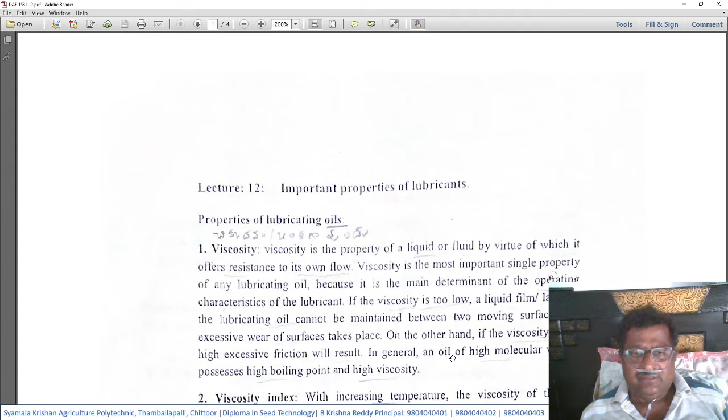Number 1, viscosity. Viscosity is the property of a liquid or a fluid by virtue of which it offers resistance to its own flow. Viscosity is the most important single property of any lubricant oil because it is the main determinant of the operating characteristic of the lubricant, since the entire lubrication process is based on the viscosity of that substance. So this is the most important property of a lubricant.

If the viscosity is too low, a liquid film or a layer of the lubricant oil cannot be maintained between the two moving surfaces, so excessive wear of surface takes place. If the viscosity is very low, it means the lubricant material is thin, so maintaining it between the two moving surfaces is very difficult.

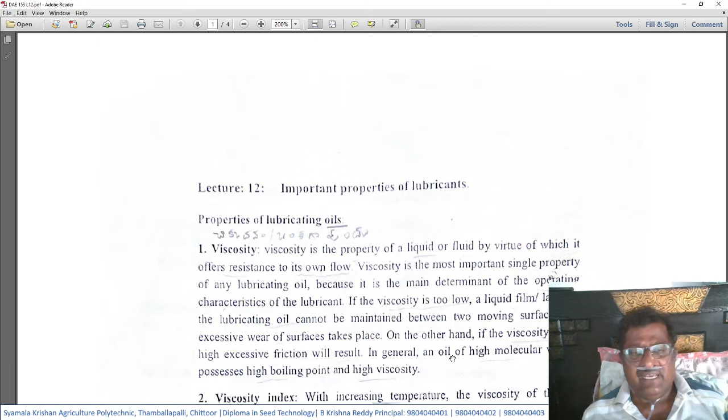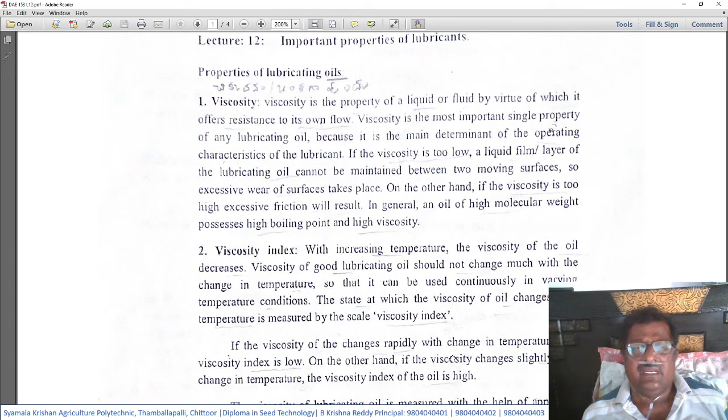In general, an oil of high molecular weight possesses high boiling point and high viscosity. In general, how we come to know that a particular lubricant oil is more viscous or not is by knowing its molecular weight. If the molecular weight of a particular lubricant is high, it indicates that the boiling point is also high, and at the same time the viscosity of that substance will be high.

Number 2 property, viscosity index. With increase in temperature, the viscosity of the oil decreases. It is a natural phenomenon. Whenever a lubricant is heated to higher temperatures, the viscosity will decrease and it starts flowing freely. Viscosity of a good lubricant oil should not change much with the change of temperature, so that it can be used continuously in varying temperature conditions.

The best lubricant should possess the viscosity index in such a way that with changes in temperature, it should not change its properties too drastically. Definitely when the temperature increases, the properties of the lubricant substance will vary, but it should be minimum, so that the properties of the lubricant will be there to serve as a lubricant.

The rate at which the viscosity of the oil changes with temperature is measured by a scale called viscosity index. That is, it is the temperature at which the viscosity of the oil changes that is known as the viscosity index. If the viscosity changes rapidly with change in temperature, then the viscosity index is low. On the other hand, if the viscosity changes slightly with change in temperature, then the viscosity index of the oil is high.

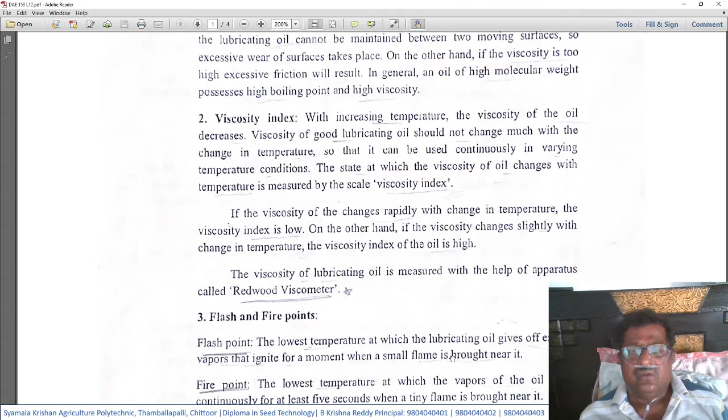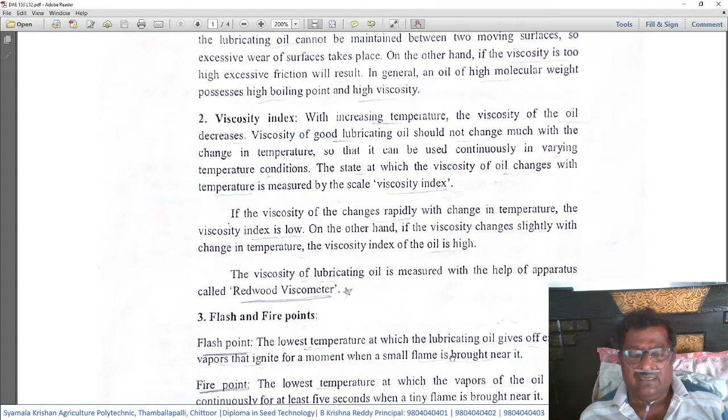To be a good lubricant, it should possess the viscosity index on a higher level. The viscosity of the lubricating oil is measured with the help of an apparatus called the Redwood viscometer. Students should remember the name of this apparatus, as there is a very good possibility that this question can be asked: what is the name of the apparatus used for measuring the viscosity of a lubricating oil? The answer is Redwood viscometer.

Then the third property, flash and fire point. Flash point is the lowest temperature at which the lubricating oil gives off enough vapor that ignites for a moment when a small flame is brought nearer to it. So at this temperature, the lubricating substance will give off small quantities of vapor, and when a flame is brought nearer to that vapor, it will get ignited for a short moment. This particular temperature is known as the flash point temperature.

Then fire point, the lowest temperature at which the vapor of the oil burns continuously for at least 5 seconds when a tiny flame is brought nearer to it. This fire point is beyond the flash point, and it is the temperature level at which the lubricant substance will get vaporized and produce sufficient vapors to catch fire and continuously burn for at least 5 seconds when a flame is brought nearer to it.

First, any lubricant material will come to flash point. Then after further heating, it comes to the point of fire point. These are the temperature levels. In most cases, the fire point is 5 to 40 degrees higher than the flash point, since the fire point is subsequent to the flash point.

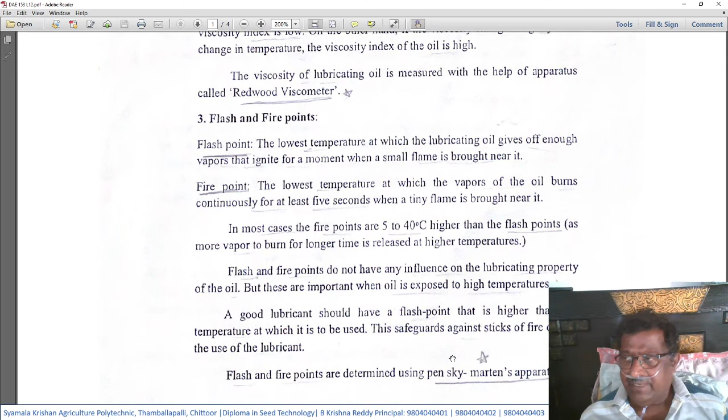A good lubricant should have a flash point that is higher than the temperature at which it is to be used. The conditions under which the lubricant is used should have a flash point or fire point much higher than the operating temperatures of the machinery. This safeguards against firing during the usage of the lubricant.

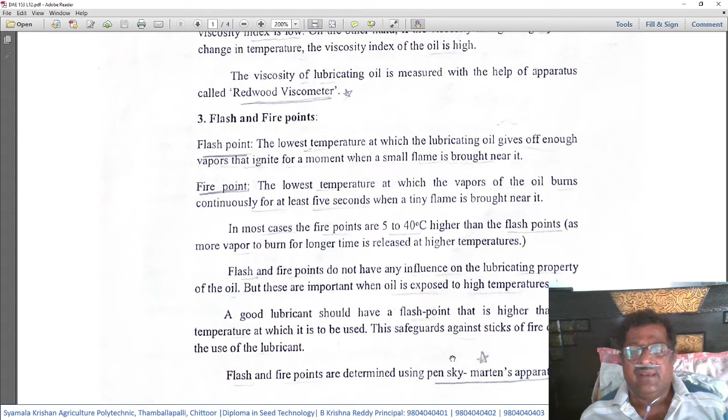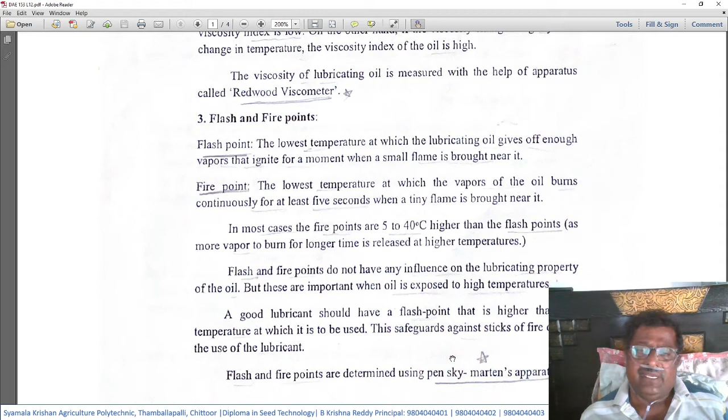Flash and fire points are determined using the Pensky-Martens apparatus. Students are expected to remember this name also. This fire point or flash point is determined by using an instrument known as Pensky-Martens apparatus.

The fourth property is cloud point and pour point. When the lubricating oil is cooled slowly, the temperature at which it becomes cloudy or hazy in appearance is called the cloud point, while the temperature at which the oil ceases to flow or pour is called the pour point. Cloud and pour point indicate the suitability of a lubricant in cold conditions.

When the lubricant is subjected to decreasing temperatures, as we decrease the temperature, when the lubricant oil becomes cloudy or hazy in appearance, that particular temperature is noted as the cloud point. When we further reduce the temperature to a certain level, the lubricating oil stops flowing, that is, it freezes. That point is known as the pour point. So cloud and pour points indicate the suitability of a lubricating substance in cold conditions.

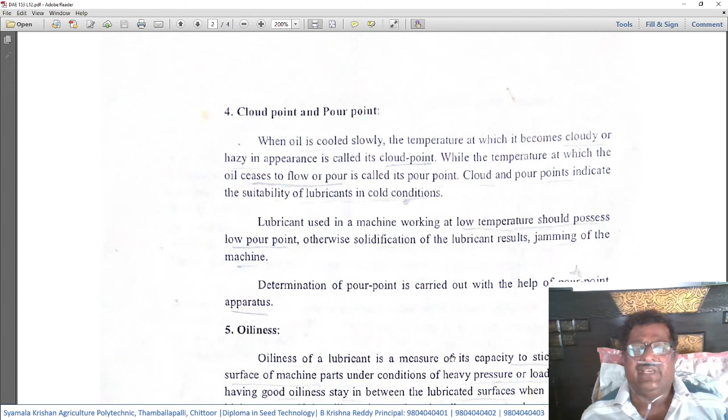Under cold conditions, the lubricant should not become cloudy or freeze; it should easily flow while maintaining its transparency. Lubricant used in machines working at low temperature should possess a low pour point, otherwise solidification of the lubricant results in jamming of the machine. If it has a high pour point, it will become solid immediately at low temperatures, and this creates jamming of the machinery, with machine parts getting jammed.

Determination of pour point is carried out with the help of a pour point apparatus, which is the machinery used to measure the pour point.

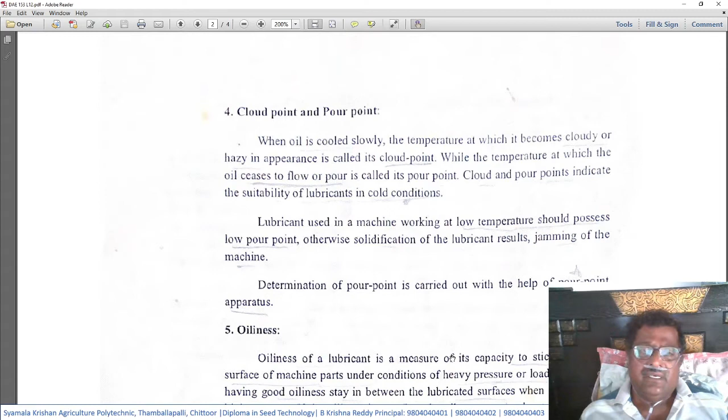The fifth property is oiliness. Oiliness of a lubricant is a measure of its capacity to stick onto the surface of machine parts under conditions of heavy pressure and load. This makes it stick strongly to the surface under high pressure conditions. Lubricants having good oiliness stay in between the lubricated surfaces when subjected to high pressure, even at very high load. If the oiliness is poor or low, the oil gets squeezed out of the place, thereby its lubrication action stops.

Suppose this oiliness is less, what happens? When it is applied between the two rubbing surfaces of a machine, it will easily get squeezed out of the place and it will be lost and no lubricating action will be there, and therefore the machine parts will get rubbed against each other and they will get damaged. So it is a very important property of a lubricant, especially for extreme pressure lubrication.

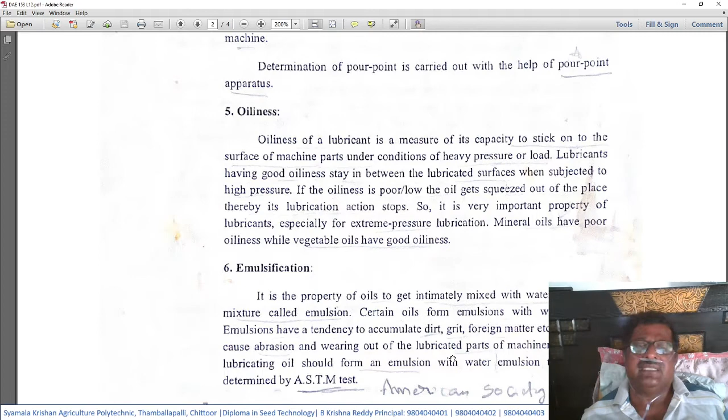Then the sixth property, that is emulsification. It is a property of oils to get intimately mixed with water, forming a mixture called emulsion. So emulsification is a property of a substance when it is mixed with water, then it should form a uniform mixture called an emulsion. Certain oils form emulsions with water easily. Some lubricant oils will have a property of mixing with water readily and forming a uniform solution known as emulsion.

Emulsions have a tendency to accumulate dirt, grit and foreign matter. So these emulsions will have a property to attract dirt and foreign materials, which can cause abrasion and wearing out of the lubricated parts of the machinery. When emulsified lubricants attract dirt and other foreign materials, the presence of such materials will create abrasion and cause wearing of the machined parts.

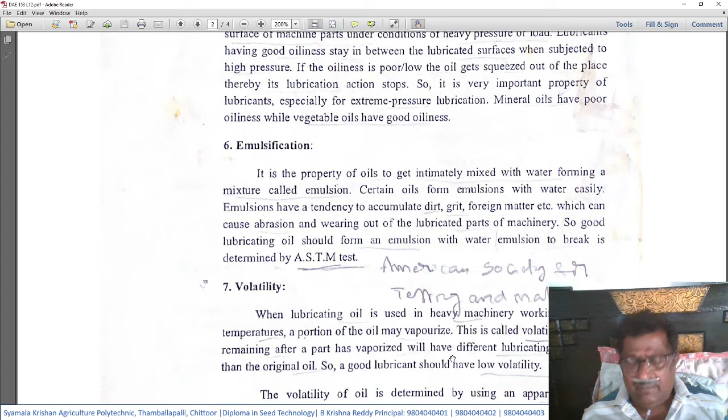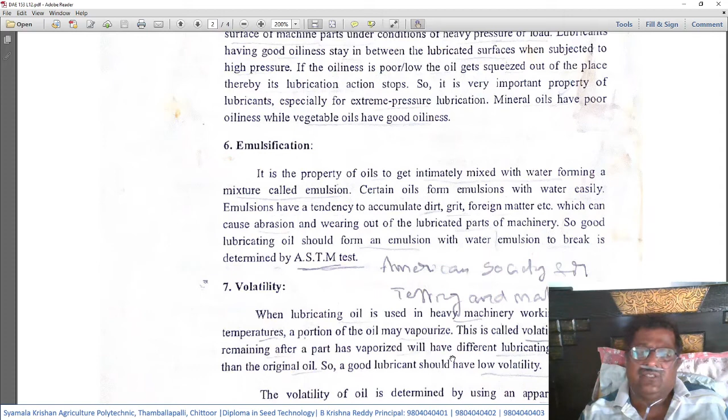So a good lubricant oil should form an emulsion with water that breaks readily. The emulsion that is formed should be very clear and it should not have dirt and other materials to be a good lubricant. This is measured, that is, emulsification of a particular lubricant can be measured by using a test called American Society for Testing and Materials, that is ASTM test. All students are supposed to remember the ASTM test, that is American Society for Testing and Materials.

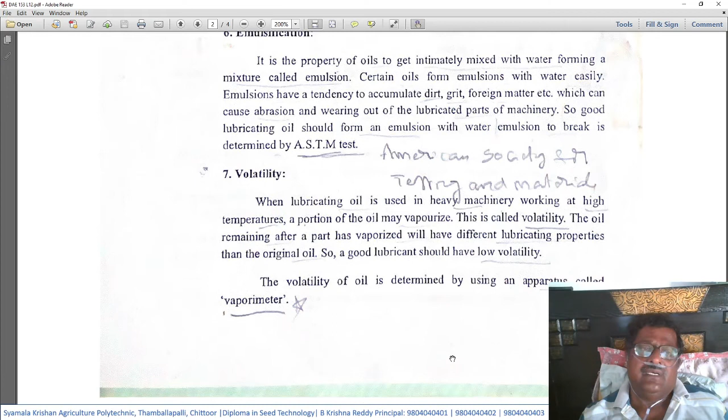Then the seventh property, volatility. When a lubricating oil is used in heavy machinery working at high temperatures, a portion of the oil may get vaporized. That means when lubricating material is kept between two moving surfaces of heavy machinery under heavy load, and when it starts working at high temperatures, a small portion of the lubricating substance will get vaporized to some extent. This is called volatility.

The oil remaining after a part of it has vaporized will have a different lubricating property. What happens when a part of the lubricating material gets vaporized? The remaining lubricating material will definitely lose its originality and thereby its lubricating properties are also lost. So a good lubricant should have a low volatility, meaning even at high temperatures and pressures, only a very minimum amount of lubricating oil should get vaporized and most of it should remain intact. Then only it is known as a good quality lubricant.

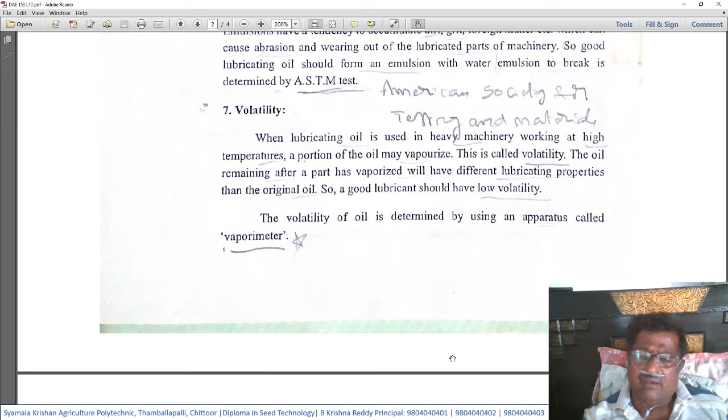So the volatility of an oil is determined by using an apparatus called a vaporimeter. This also students are expected to remember, that is the apparatus name, vaporimeter.

Then the last, eighth property, is carbon residue. Lubricating oils have a high percentage of carbon in combined form. That is, most of the lubricants will have carbon as a constituent. On heating, when this lubricating substance is subjected to heating, the oil decomposes and carbon is released, which will get deposited on the surface of the moving parts of a machine.

This deposition of carbon in machines is intolerable, especially in internal combustion engines and in air compressors, where it is not at all tolerable. Therefore, a good lubricant must have less carbon residue. So to say that a particular lubricant is best, it should have a minimum carbon residue in it after combustion or after usage.

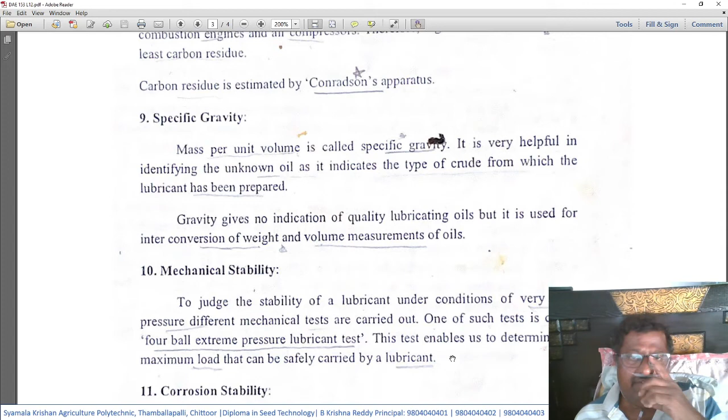Then the ninth property of lubricants, specific gravity. Specific gravity is nothing but the mass of a substance per unit volume. It is very helpful in identifying an unknown oil as it indicates the type of crude from which the lubricant has been prepared. So by knowing the specific gravity, we can know from what type of oil a given lubricant has been manufactured or prepared.

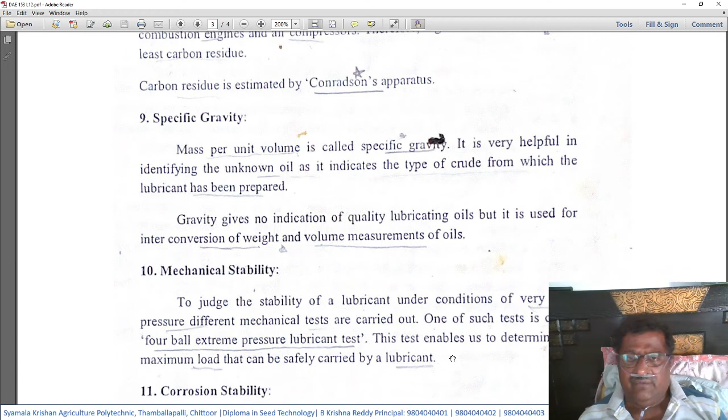Gravity gives no indication of the quality of the lubricating oil, but it is used for inter conversion of weight and volume measurements of an oil. While making lubricants, different quantities of different materials need to be used, and they can be measured either on a weight basis or a volume basis.

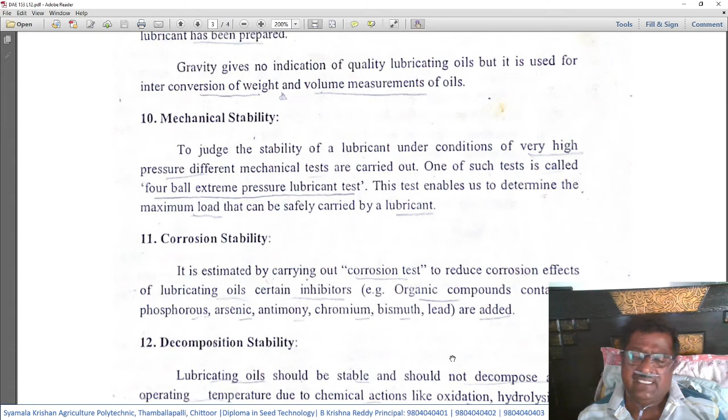The 10th property is mechanical stability. To judge the stability of a lubricant under very high pressure, different mechanical tests are carried out. One such test is the 4-ball extreme pressure lubricant test. This test enables us to determine the maximum load that can be safely carried by a lubricant—the highest pressure or load it can carry without getting damaged or losing its lubricating properties.

The 11th property is corrosion stability, estimated by carrying out a corrosion test. Most lubricating oils have certain corrosive characteristics. To reduce the corrosiveness of such oils, we add corrosion inhibitors—organic compounds containing phosphorus, arsenic, antimony, chromium, bismuth, lead, etc.—which reduce the corrosive nature of the lubricant oil.

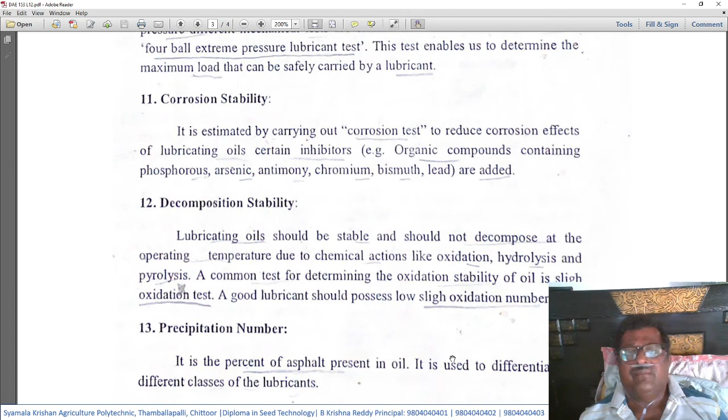The 12th property is decomposition stability. Lubricant oil should be stable and should not decompose at operating temperature due to chemical actions like oxidation, hydrolysis, and pyrolysis, or due to changes in chemical or physical properties.

A common test for determining the oxidation stability of oils is the Sligh oxidation test. This test is used to measure or find out the decomposition stability of a lubricant oil. A good lubricant should possess a low Sligh oxidation number, meaning it should not get decomposed or oxidized except at very high temperatures, and even then only slight oxidation is desirable. If it gets oxidized significantly, the lubricant is not a good lubricant.

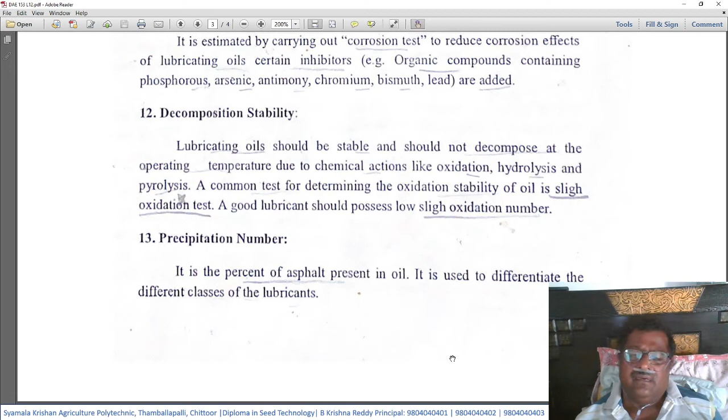Next is the precipitation number. It is the percent of asphalt present in the oil, used to differentiate the different classes of lubricants. The precipitation number indicates only the percentage of asphalt present in the lubricating substance, and is useful only to differentiate between various lubricant oils.

Then the 14th property, ash content. The percentage of ash in lubricating oil, especially in already used oil, is very useful in determining materials that may cause abrasion, wear and tear of machine parts. Ash content is measured after using the lubricant; if the ash content is more, it indicates it is not a good quality lubricant, because more ash will result in abrasion of the moving parts of the machine.

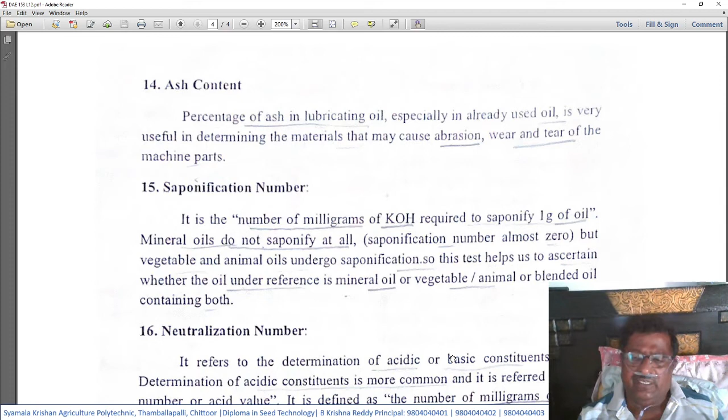It is the number of milligrams of potassium hydroxide required to saponify 1 gram of oil. Saponification is the process of making soap. Mineral oils do not saponify at all—they never form into soaps, so the saponification number is almost zero for mineral oils. Vegetable and animal based oils, however, readily undergo saponification and form into soaps.

This test helps us ascertain whether the oil under reference is a mineral oil, vegetable oil, or animal oil, or whether it is a blended oil containing both. This saponification number indicates whether the given lubricant oil originated from mineral, vegetable, or animal source, and can also tell us if it is a blended lubricant containing both vegetable and mineral oils.

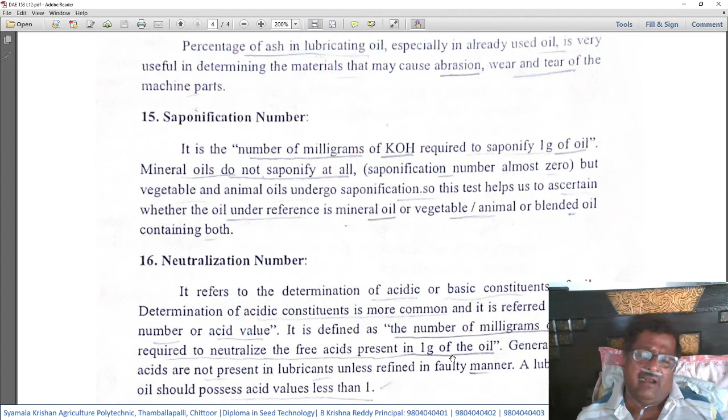The 16th property is neutralization number. It refers to determination of acidic or basic constituents of an oil. Determination of acidic constituents is more common and is referred to as acid number or acid value. This test finds out whether a given lubricant is acidic or alkaline in nature. It is defined as the number of milligrams of KOH required to neutralize the free acids present in 1 gram of oil, measured in terms of milligrams of potassium hydroxide required to neutralize free acids in 1 gram of a given oil.

Generally, free acids are not present in lubricants unless refined in a faulty manner. Most lubricating substances will not have any free acids, but rarely they may be present because the refining process may be faulty. If manufacturers follow a faulty refining procedure in making the lubricants, there is a chance that free acids may be present in the lubricating substances.

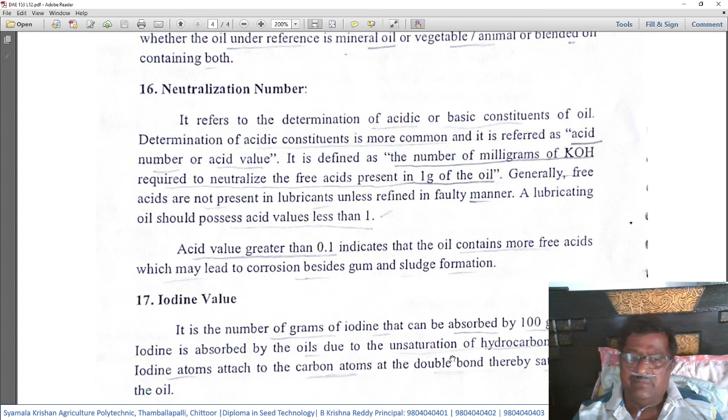The 17th property is iodine value. It is the number of grams of iodine that can be absorbed by 100 grams of oil. Iodine is absorbed by the oil due to the unsaturation of the hydrocarbon chain. Iodine atoms attach to the carbon atoms at the double bond, thereby saturating the oil. These lubricant oils, being of hydrocarbon nature, are unsaturated, and therefore to become saturated, when they come in contact with iodine, they absorb it. So iodine values are expressed in terms of grams of iodine that can be absorbed by 100 grams of lubricant oil.

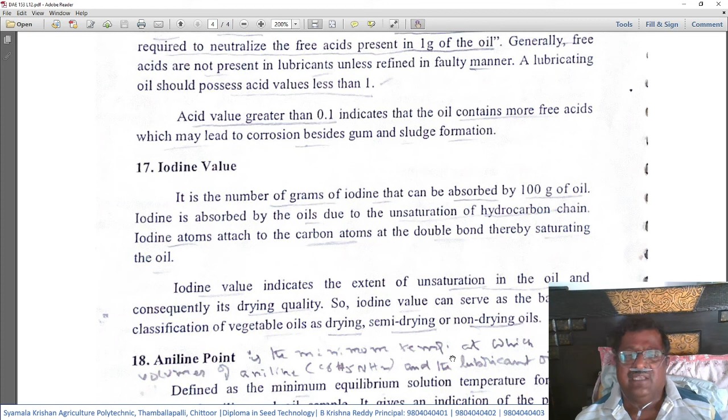Iodine value indicates the extent of unsaturation in the oil and consequently its drying quality. So iodine value can serve as the basis for classification of vegetable oils as drying, semi-drying, and non-drying oils. This iodine number is useful to classify vegetable oils used as lubricants into these categories.

The 18th and last property of lubricants is aniline point. This is the minimum temperature at which equal volumes of aniline, that is C6H5NH2, and the lubricant oil are miscible. Miscible means combined uniformly, or dissolved into each other in any proportion — when these two substances are available in any proportion, they will get uniformly mixed up. That is known as miscible.

It is defined as the minimum equilibrium solution temperature for equal volumes of aniline and oil sample — that is, the minimum temperature at which aniline and the lubricant oil get miscible. It gives an indication of the possible deterioration of oil in contact with rubber sealings, packings, etc. This aniline point indicates, when the lubricating oil comes in contact with the rubber sealings and packing materials of machinery, to what extent it will get deteriorated.